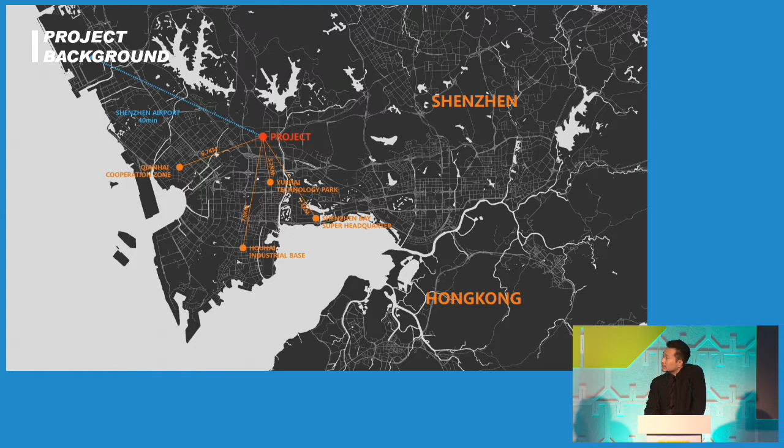Because the high-tech park is quite dense, the government was planning to build a new high-tech area in the north of the high-tech area. So this is the area where it's located, and it's about half an hour from the airport.

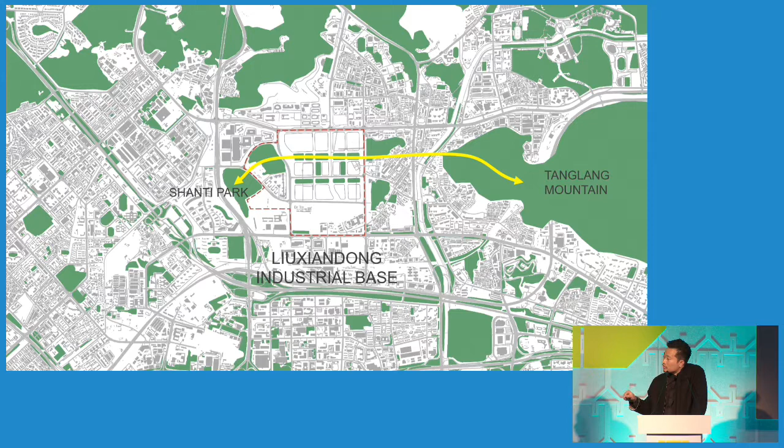Vanke is the biggest real estate company in China. They wanted to build a design community, meaning a creative industry workspace, collaborating with different fields including strategy planning, master plan, architecture design, graphic design, interior design, and landscape design. So it's all for this kind of creative office.

They gave a commission saying that no unit should be more than 500 square meters. So they would all be small offices, not really big offices inside.

This master plan was done by Urbanus, another famous company in China. They did the master plan, saying that each plot should continue through public space. We are actually inside plot number 2, but it's quite complicated.

Plot number 2 is designed by 4 architecture clusters in Shenzhen. Plot number 3 is a cluster designer based in Beijing, and plot number 4 is based in Shanghai. So even in this small area, there are 13 different architects working together.

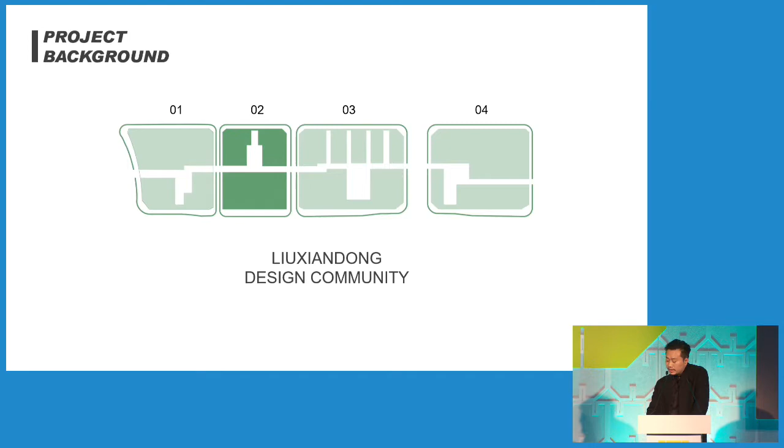We are inside this plot number 2, and it's cut through with this idea of public space, and also a light channel cutting through to break the plot into small buildings.

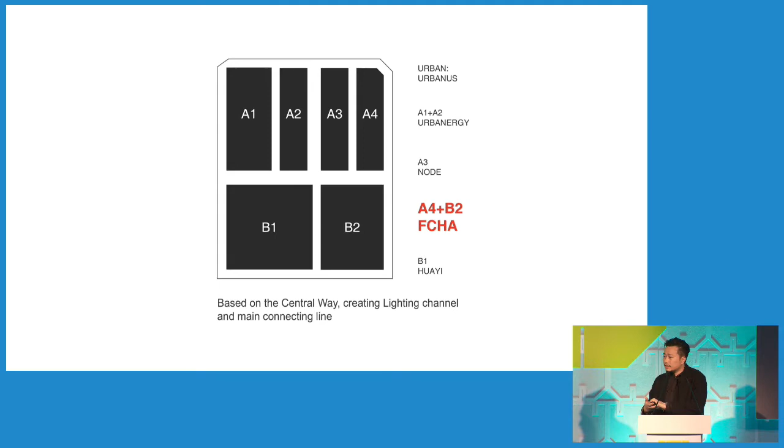We are in A4 and B2, designed by us for interior and architecture. A3 is Node, A1 and A2 is Urbanergy, and B1 is another Huayi company. So it's 4 different architects working back to back next to each other, as one project.

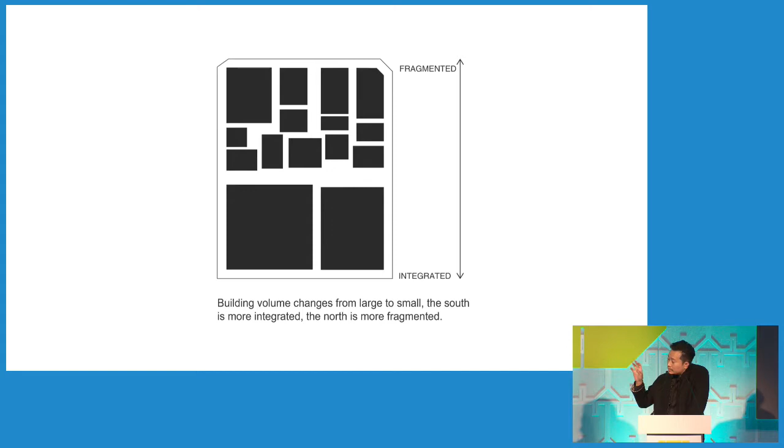After a few workshops together, we came up with some ideas and also some control rules: from the southern part it should be a big volume, in the northern part it's segmented, and in the southern part it's bigger.

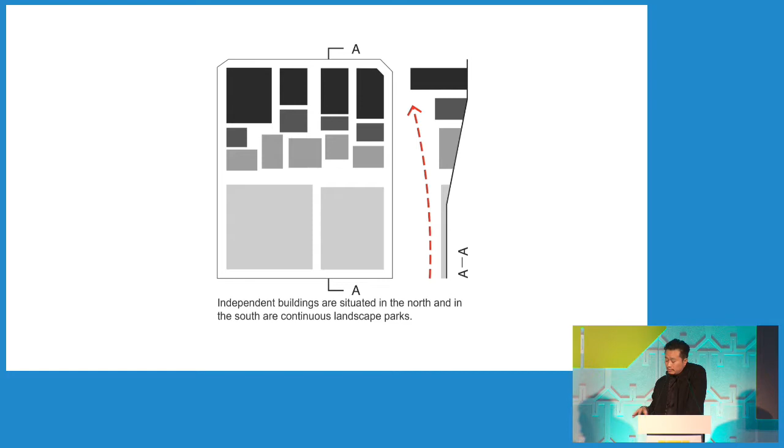Also important, underneath there's an underground part, and the FAR above ground is 0.3, and under the ground is 0.6. So it's roughly an FAR 1 project.

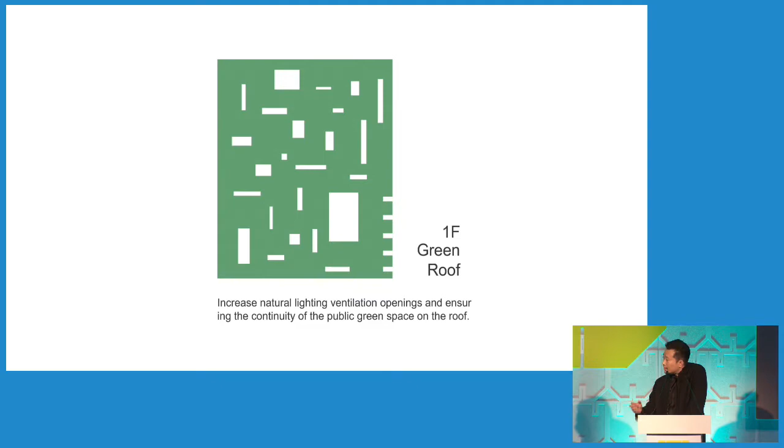We should also increase more holes for ventilation and lighting for the underground office, and it should be a continuous roof. So the roof goes to the ground from the top, then you see a continuous park.

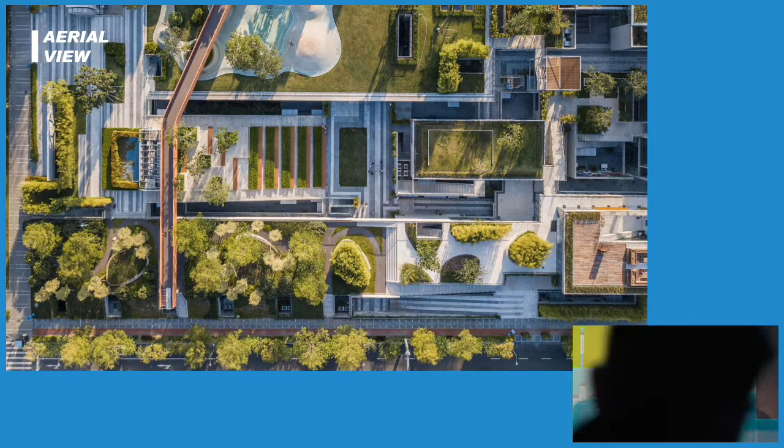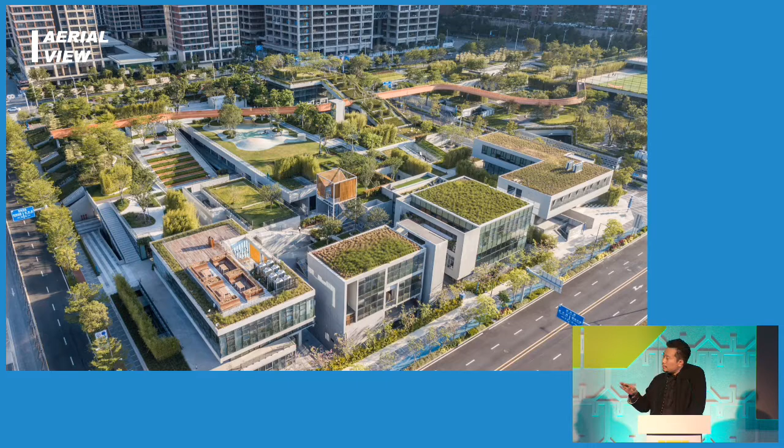In the middle of our project, there's a big slope connecting the basement level to the upper level, allowing accessibility for people. It's also a kind of open outdoor theater for big events. So when people go down, they can have different views.

This is a project without almost any facade. It's really just basic material: poured concrete, glass, and some aluminum panel. So this is the outdoor experience.

This is exactly the project we designed for architecture and interior. But we also, as architects, were the manager of the whole project to coordinate the other architects, because it's a complicated project. It should be unified as one.

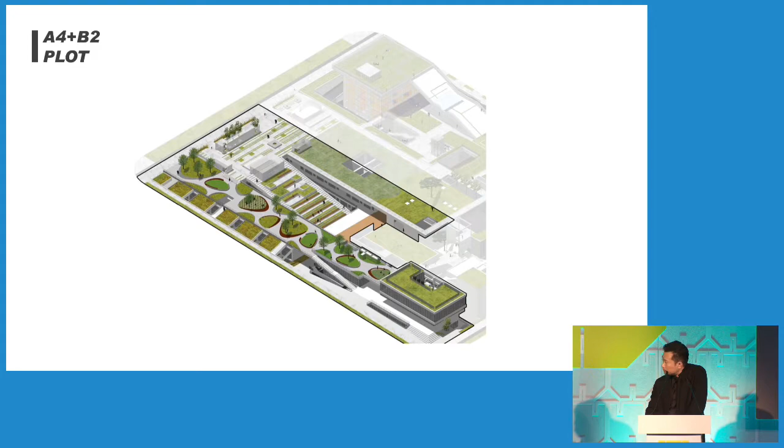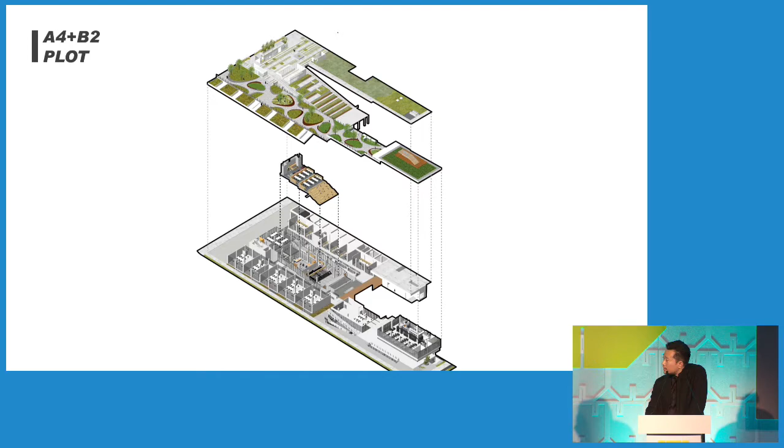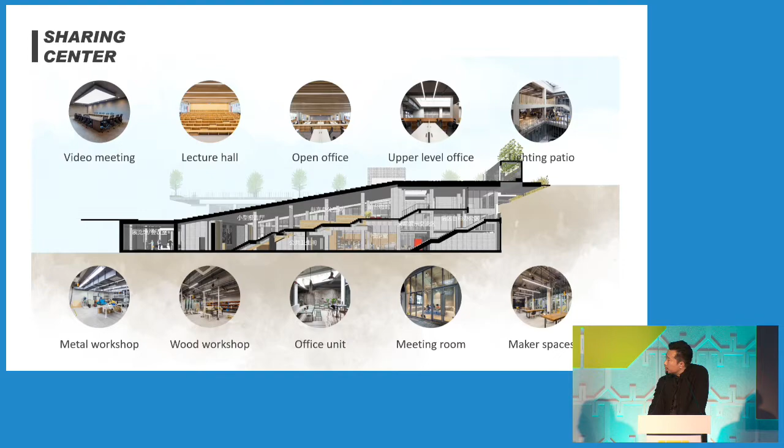This is the main section for the big sharing space, let's say it's a co-working space. It contains quite a lot of different programs: the lecture hall, the open office, a kind of workshop, maker space, meeting room, small meeting room. This is the lecture hall when it's open.

And that's a kind of curtain wall that can close. When it's open like this, you can see a view. So recently quite a lot of lectures have been happening here in Shenzhen.

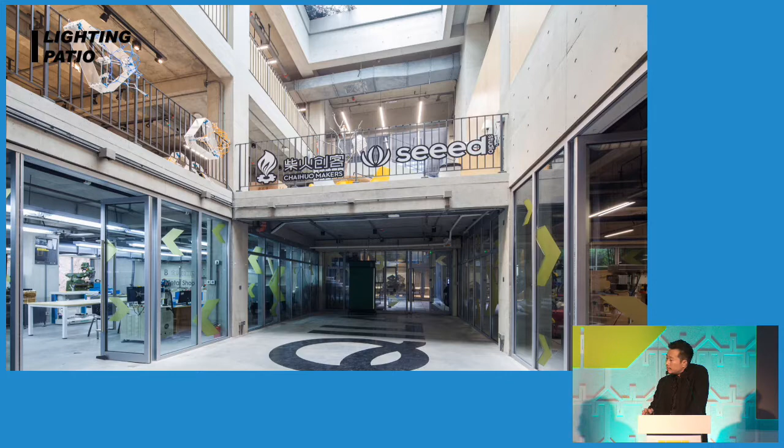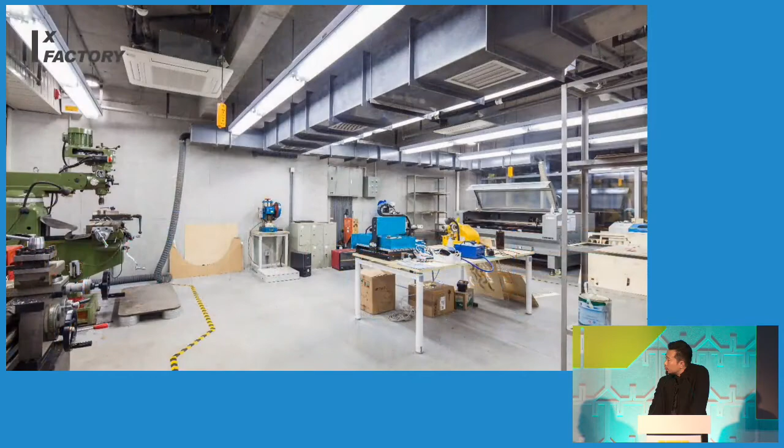This is the office platform, a co-working space. This is the maker rooms, so on the left side is the metal room, and on the right side is the wood room. So different platforms: 3D printer room, wood workshop, metal workshop, meeting room, small meeting room.